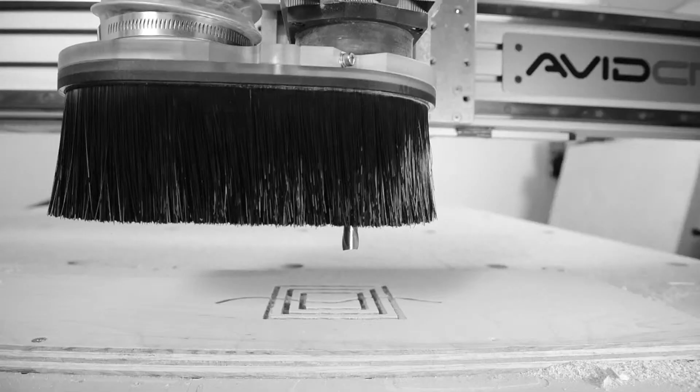Don't you just hate when your sawdust goes everywhere? Don't you just wish there was some sort of thought-through solution to maximize chip collection? So, welcome to Dust in the Wind, Not in the Air. I think that was the slogan you came up with, huh, Cory? Yeah, it's how do we get these chips into the dust collector and not in the shop? Right, awesome.

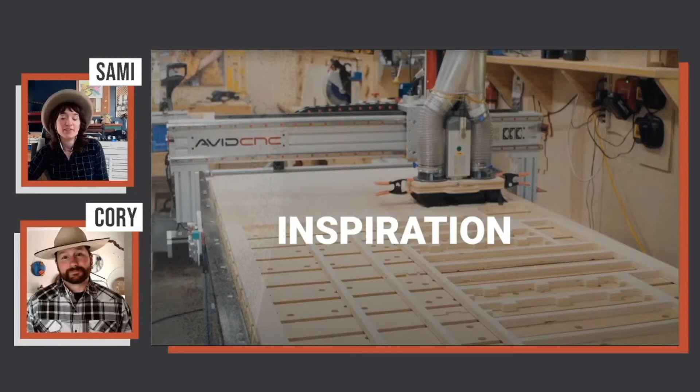So first we're going to go over some of the inspiration for this particular dust shoe that Brian Fogg, one of our awesome team members, has designed and has been spending some time refining: a DIY project that is really a more refined system and has lots of attachments and curated options depending on your particular setup. So first, let's dive into the inspiration that informed some of these design decisions.

So, Cory, will you first tell us a little bit about the original Avid CNC dust shoe project? Yeah, so this was based off of a lot of different inspiration from more traditional dust boots. It was made from high density polyethylene, or HDPE. It used a magnetic base, so it did have a breakaway feature, and was one that you could make with your CNC machine. Right, and that's really convenient to be able to make your dust shoe as one of your first projects, so you can start having dust collection sooner rather than later.

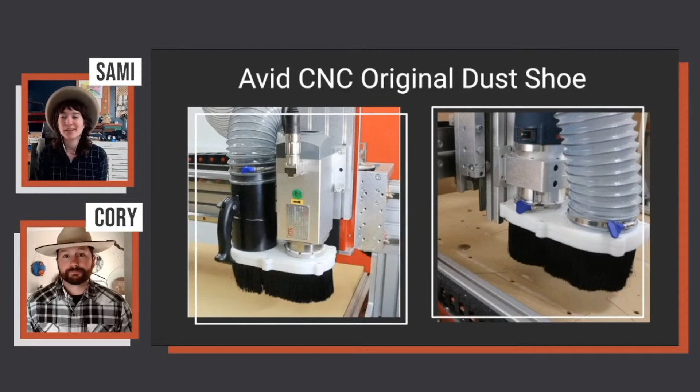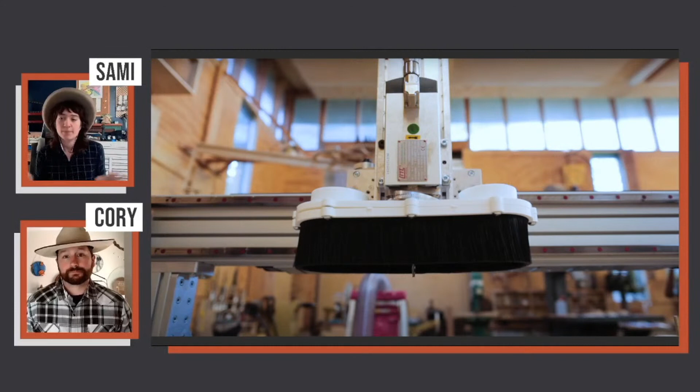I used this particular one for years and it was awesome, but there's always room for improvement and customization. So another CNC legend that we definitely drew some inspiration from is Frank Howarth. He was probably one of the first people I saw to do a more DIY solution for the dual hose dust boot, which is really great depending on if the machine is moving left or right, if the chips are being shot either way, there would be more distributed collection there, right?

Yeah, and Frank went way beyond the dust shoe on his dust collection system. He has a ceiling attachment and a bunch of really great elements that make his machine able to collect that dust effectively.

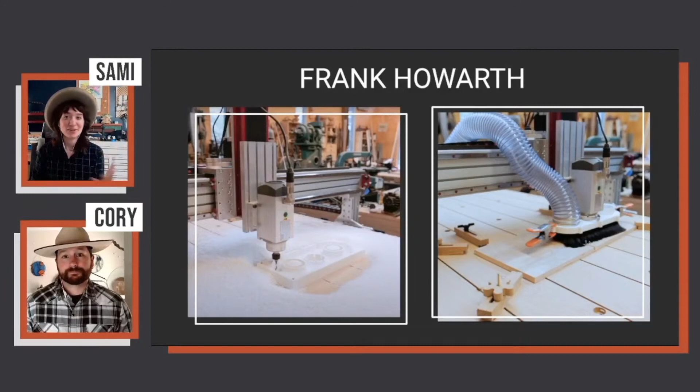Right, and I also have a really lovely curated playlist all about CNC dust collection. Many of the videos included show content creators' solutions, whether they decided to purchase a dust shoe or make their own, as well as how they integrated it into their larger dust collection system in the shop. CNCs are really a part of the larger ecosystem, so tying it into central dust collection is really essential.

And another awesome maker that we referenced and were inspired by was Jay Bates. He made a plywood version of the dust shoe that also had the breakaway feature. I think this was really appealing because more folks have scrap plywood than scrap HDPE available. So this was a really approachable project, and I really liked that it was something anyone can make pretty much the first day you had your machine up and running.

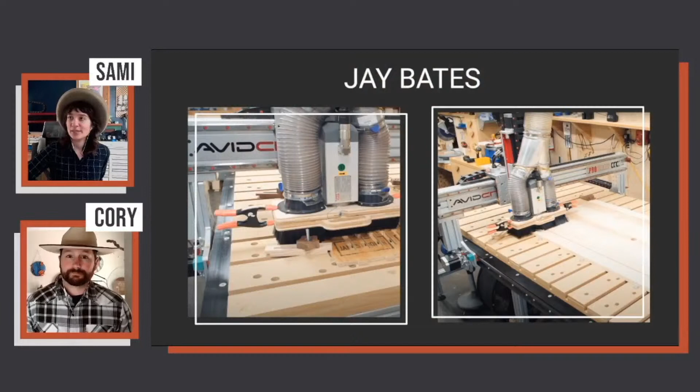Okay, so let's jump into our strategy overview for how to approach designing a shoe, and the different kinds of things you might consider when making those decisions. So Cory, do you want to take us away on some of the things you might consider with dust collection strategy?

Yeah, so the first one that I like to talk about is bit selection, and bit selection is going to help determine a couple things. It's going to help determine where the chips are going and where they're not going. And so whether it's a down cut, an up cut, or a compression bit, we should be aware of where those chips are going to be headed and be accounting for that in our toolpath strategy.

We'll also get to dive into what is a good chip and talk a little bit about chip load and chip evacuation and really how to maximize that as well. Yeah. And then we'll talk about different custom stuff that you can do for your particular work environment. And also just the dust boot or the dust system that you're using, different tools, different materials. We could have very different dust boots and success there.

Right. And something that Brian was sure to point out to me to consider is the materials, not only the different attachments you might use for different materials, and we'll dive into that a little bit more, but what kind of chips and if the material will create chips at all. So for example, a lot of types of foam aren't able to create chips like you can with more sheet goods like hardwood or MDF or plywood or aluminum, and really how to make adjustments for those particular things, right?

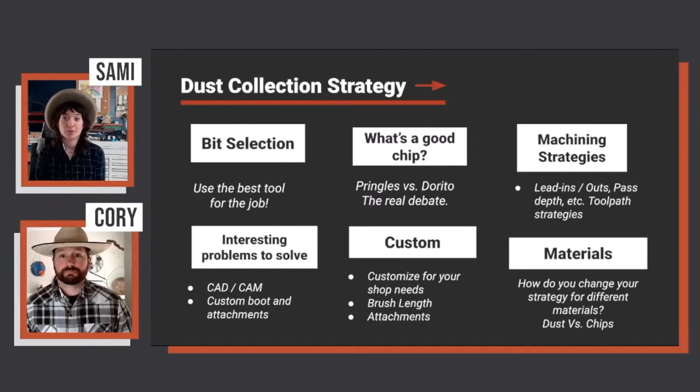So let's go ahead and talk a little bit about chip canyons and channels. So Cory, can you fill us in on this term? I think this is a term that we kind of came up with to describe the problem, but also the solution. Yeah. So as our tool moves through the material, if that canyon or the negative space the tool is creating is only the width of the tool, we have very little chance for those chips to come out of the canyon unless they are encouraged to come out.

And so when we talk about that chip buildup, if we're not encouraging the chips to leave the canyon, the next time that tool comes around, those chips are going to act as an insulator. So they already have a bunch of heat built into them when we created them. And then when we come back, that heat's going to continue to build and store in that canyon. And heat is going to be the fastest way for us to dull our tool, which is the fastest way to have a reduced cut quality.

Right. You know what? This analogy really reminds me of the visuals in some of our state parks. So I think of this hike called the Narrows in, I want to say it's in Zion, and it's a very, very narrow kind of canyon. So when it floods, the water just rushes down, and it's very hard to kind of get out of the way. Everything kind of gets blocked up if there's debris.

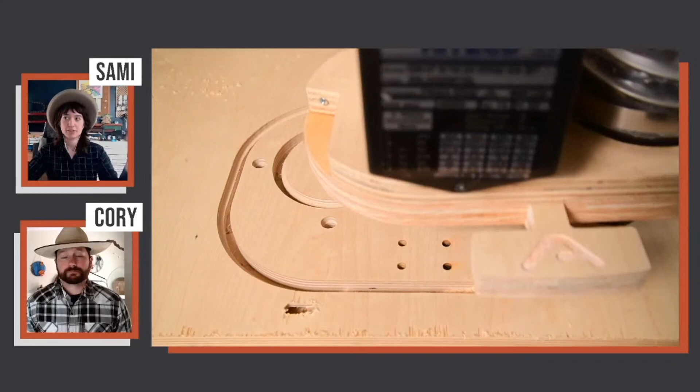Right, exactly. So offsetting those vectors, say for example you're doing a profile cut, and offsetting the vector, cutting that halfway through, and then cutting the final vector will allow for an additional step for that chip to evacuate, which is a machining strategy that Brian implemented here in the project files as well.

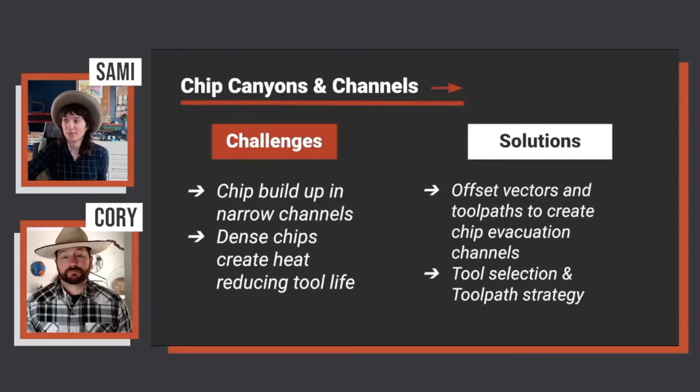So dust versus chips. Can you describe to me a little bit about why we would like to avoid dust and what we might do if we can't avoid making dust? Yeah. So if we are making dust, ideally the scenario is we're cutting MDF, and that's because you cannot make chips with MDF. It only makes dust. And so how we make dust is we are rotating our tool too fast for our feed rate. And so we're rubbing or essentially creating such a small chip that it is considered dust.

And when we are using tooling like that, essentially we're going to dull the tool a lot faster, and we're not going to evacuate the heat. This comes back to heat a little bit here.

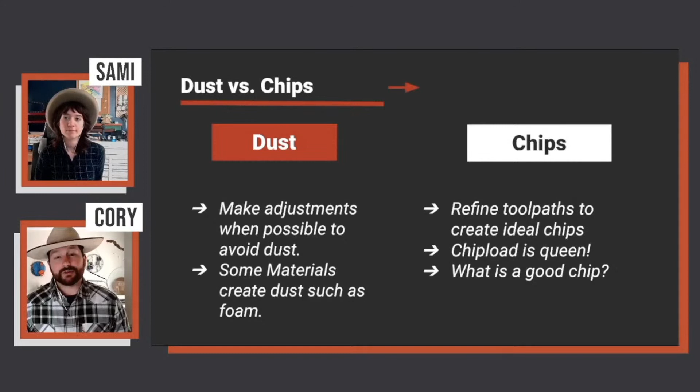And so when we talk about inspecting our chips or our dust, if we see dust, we should slow our rotational speed of the tool down, or we should increase our feeds or our lateral movement of that tool so the tool can have more bite.

So I love hearing you talk about chip load also. This was one of our subjects for last year's Vectric user group meeting, where we kind of dived into plywood and plastics as well as aluminum and brass, and really how to refine your chip load and all of the knobs you might turn to get the ideal chip. But maybe you can give us the spark notes on this subject.

Yeah, I like to use an analogy of bread. If we have a really dense bread, we can cut a perfect slice of that bread that's very thin because the density of the bread holds it together. So if we had a pound cake, we could cut a really narrow slice and it would still look like a complete slice. It wouldn't be falling apart into crumbs. And if we had a lighter density like a French bread, we might have to cut that at a 1 inch thickness or 3 times as thick in order to get a perfect slice. If we tried to cut it smaller, it would just turn into crumbs.

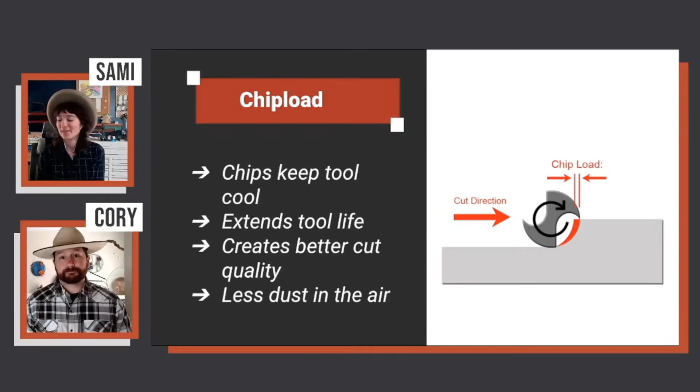Oh, I love that visual. That's awesome.

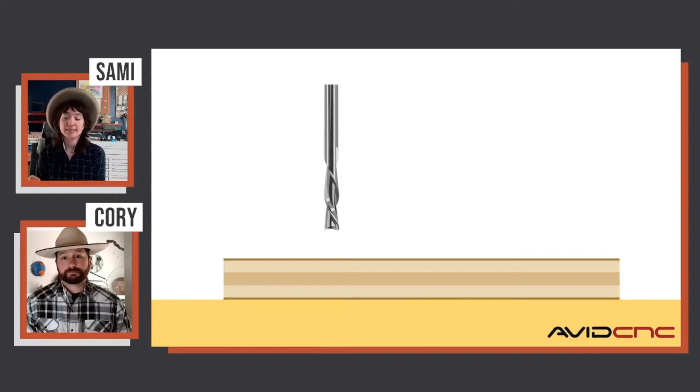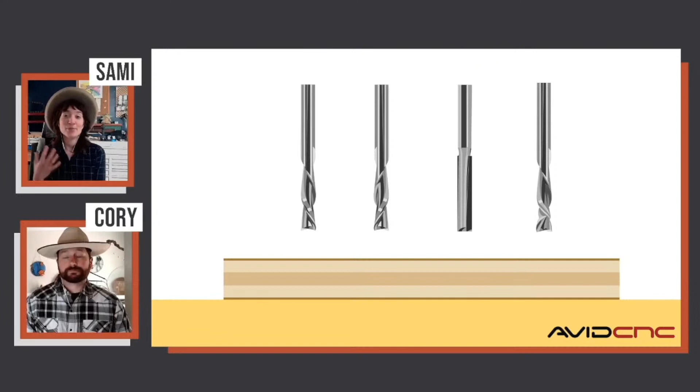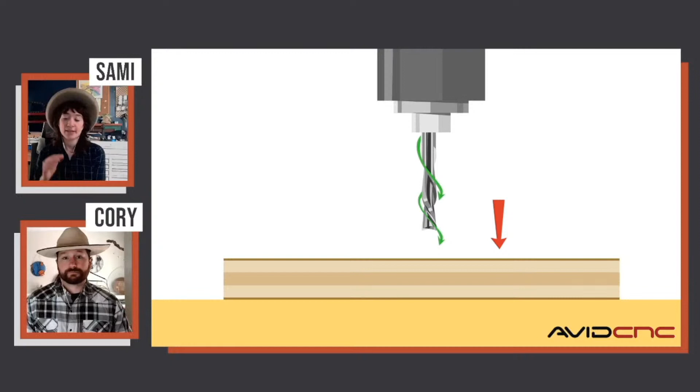So another thing you might consider is tool geometry. You'll consider the shape of the tool to match your material and your cut quality needs. So you might choose a down spiral in order to have a really nice surface finish on the top of your veneer. However, a down spiral bit really presses the chips downward and compresses them. So it's not as ideal for chip evacuation, which, as we're talking about, is our goal, to maximize it. So you have to make adjustments, like for example, doing the offset toolpath to create a wider canyon.

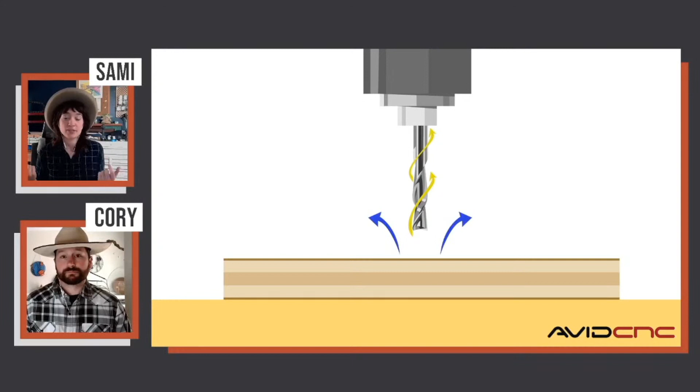Or you can select a specific bit like an up spiral bit if you're cutting something like HDPE or aluminum in order to evacuate the chips, especially in circumstances where compressing the chips would really heat the bit up too much. So a down spiral bit wouldn't necessarily be used for peck drilling or creating deep holes, because as it's creating that hole, it's jamming the chips downward, creating heat, which is reducing the life of the tool.

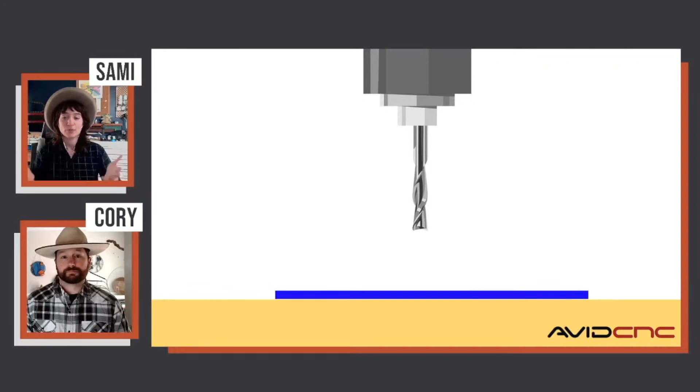An up spiral bit will potentially tear out the top surface of your veneer, but it does help evacuate chips. It is more ideal for something like plastics, where you want to remove the chips as much as possible, but still leaves a good surface finish on the top. It doesn't have that issue with grain direction like you do with wood. So those are some things to consider, whether it's selecting the tool for the best cut quality, but then also how to make adjustments for that tool geometry, whether it's in your CAD or your CAM, in order to get the ideal combination of choices here.

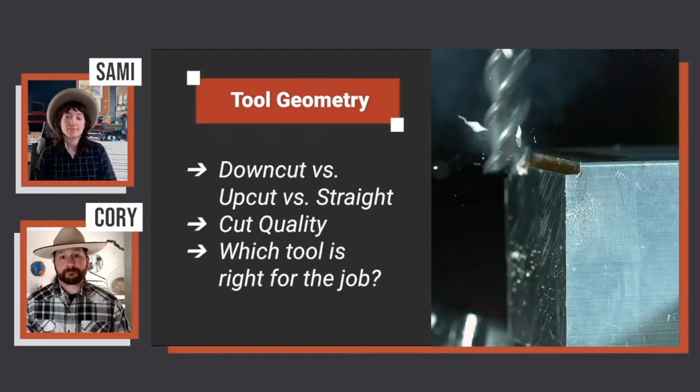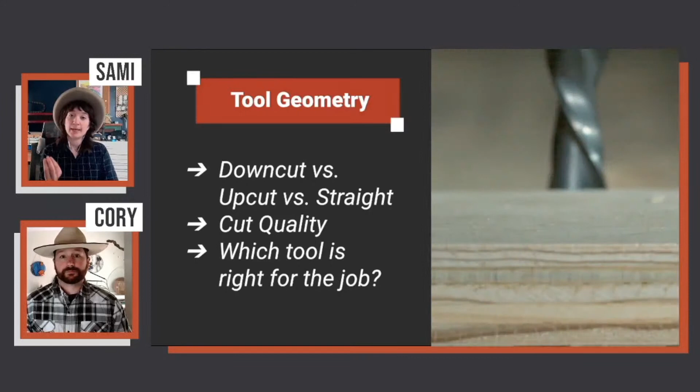And as you can see here, there's an excellent video by Jonathan Katz-Moses, and he has some slow-mo footage of a down spiral bit versus an up spiral bit versus a straight bit. So you can really see how the bit is affecting and making the material flex as it's cutting.

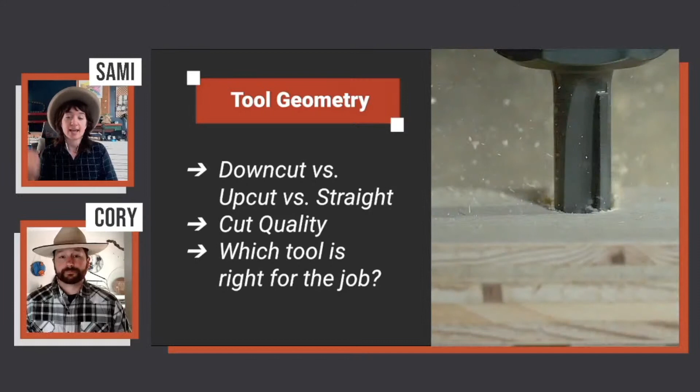As we were just talking about what you might consider when selecting the bit, other things you might consider are if I select multiple tools that are ideal for different types of tool paths. For example, I might have a peck drilling operation as well as a profile operation. Perhaps the ideal tool for both those tool paths are different. But if we select the same tool for both of those, that would reduce the number of tool changes that we have to do.

In this project, to make it as simple and straightforward as possible, Brian programmed it with one bit, which was the quarter inch down spiral. In order to accommodate for that, he made some adjustments to the CAD and CAM so that that particular tool would still work in scenarios where you might have chosen a different tool.

We also included the appropriate ramps and additional tool paths for when we come in and make contact with the material, and when we're down in the bottom of those canyons, there's an opportunity for those chips to get out. So the challenge when creating your CAD and CAM is to look for opportunities to create chip evacuation. Creating a ramp and a lead-in allows more space for those chips to move out of the way of the router bit.

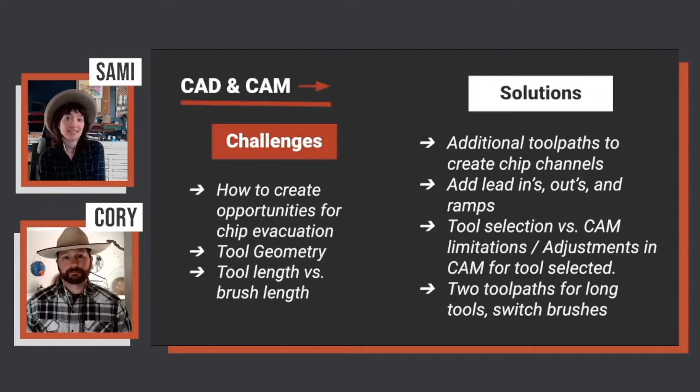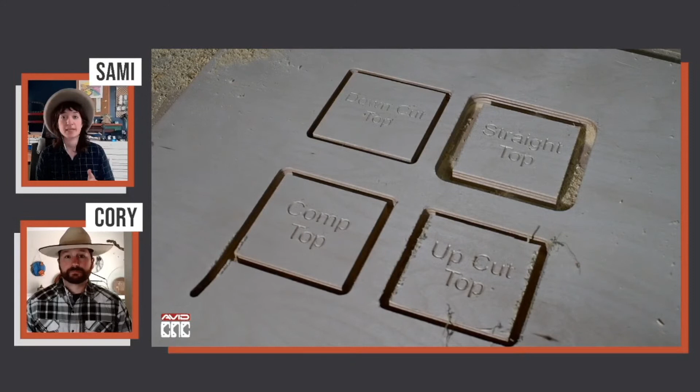This project might give you the opportunity to do some tests. If you're going to do a large production run of something, it might be worth it to do five smaller tests of that particular material with that particular setup. You have specific fixed variables, probably the material or the tool you're using to cut that material for that geometry, that vector geometry, and then adjusting what attachments and what toolpath variations you add in.

Cory, can you tell us about what's a good chip? I'm partial to Pringles, but Brian and I were having this debate the other day, he's more of a Dorito guy. So really, how do we determine which one is better? I gotta say, Tim's Cascade jalapeno, it's kettle cooked in peanut oil, there is no better chip. Yeah, that's fair.

And then when you cut your chips, you were mentioning earlier that we were talking about doing various tests. When you cut a chip and you're turning a different variable, what's the difference between an okay chip, a good chip, and a really good chip? Say, for example, we'll use plywood as an example. Is there a particular cut finish or density or thickness that we should be looking for?

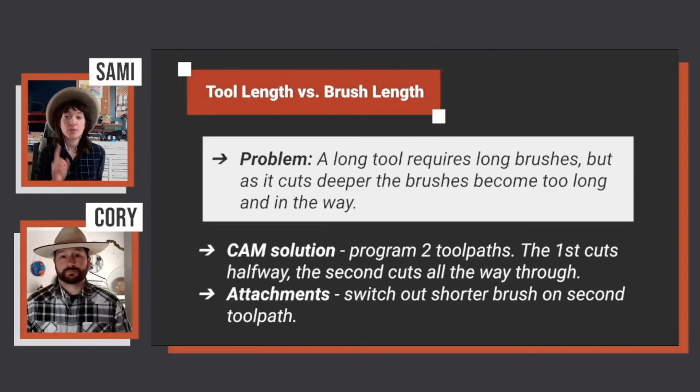There's a few different accessories that you can design, add on, and customize depending on the material you select. Having various brush lengths will help depending on the length of your tool. Perhaps you program two different tool paths for the same tool, say it's a long reach tool and it cuts through halfway, then it will stop. In the second tool path, you can switch in the shorter brush length so it reaches just the top surface of the material as it does its final passes.

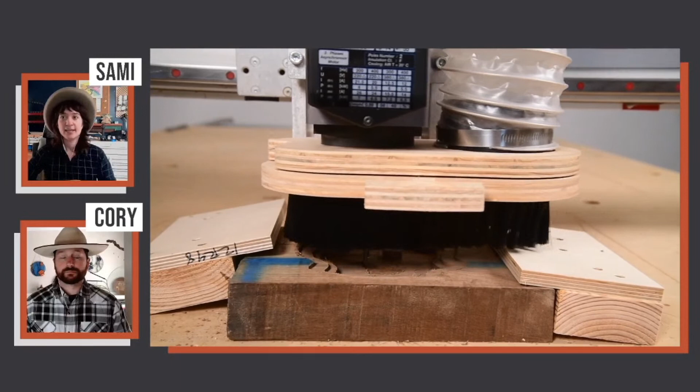You can also add on a reducer from 4 inches to 2.5 inches in order to collect the chips adjacent to the tool paths.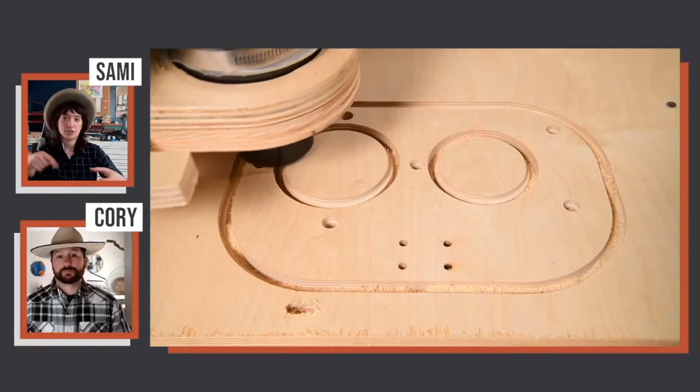Brian did a very clever thing here, which was to offset the tool paths, the spacing between the spindle nose and the hose on the side, so that the reducer went right above all of those canyons and was able to suck up all of the chips within the canyon itself. The reducer allows us to remove the same CFM air, but out of a much smaller nozzle, so we're really going to pull even more chips out of that canyon using this reducer.

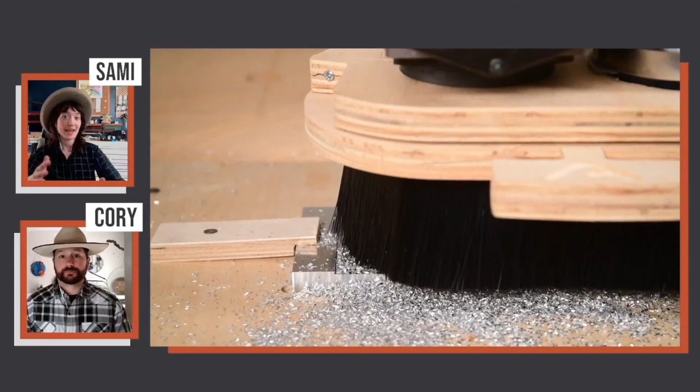There's also a compressor attachment where you can direct the air to blow the chips away. For example, when cutting aluminum, one of my least favorite tasks is cleaning my brush afterward, because it's full of fluid and aluminum chips stuck in it. So instead of having a brush for cutting aluminum material, you have compressor attachments that blow the chips into a directed area. There's also a lifespan to the brushes, so they are kind of a consumable object.

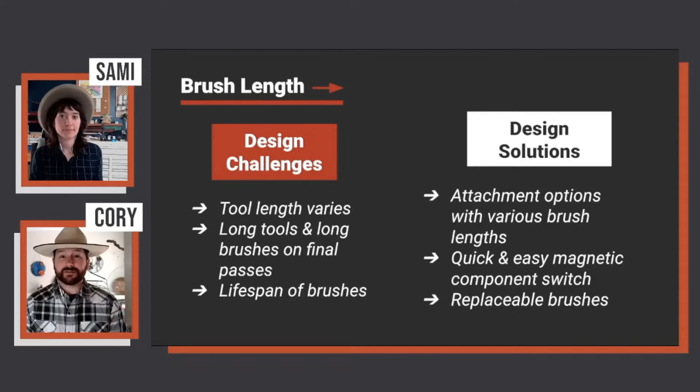This design allows you to replace the brushes as necessary, and these are inexpensive parts that you can machine over and over again. I would encourage everyone to have 2 or 3 different brush lengths, and if you want 4 or 5, between your reducer and other things, nothing is stopping you here with this design. It's very accessible and cost effective.

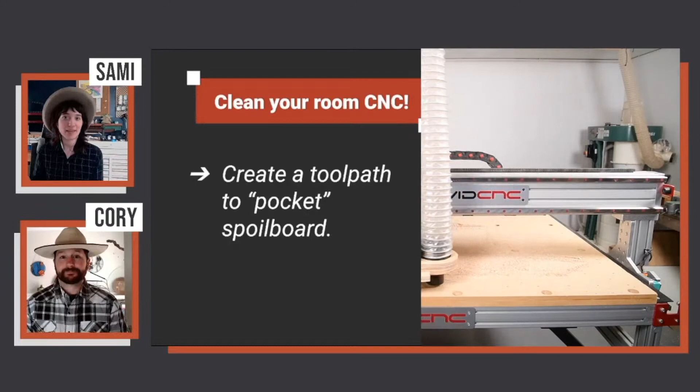So Clean Your Room CNC, this was a program I used to run, and I'm sure many other CNC operators used something similar. But this is just what I called it. Cory, I'm sure you do this as well, creating a pocket tool path so your CNC runs across the spoil board to clean up all of your chips and extra dust at the end of the day. It's always nice to come back to a clean machine spoil board the next day.

It also helps with the fact that you can't always reach the other side of the spoil board with your shop vac, and chips can escape, so it's nice to just have a sweep at the end of the day. Yeah, I think this is great.

And you can do different versions of this. You can have one that essentially just does the perimeter, and one that rasters along X or Y. Mine is saved on my desktop, and I run it all the time. When you told me about this, it was like, wow, that's such a simple solution. You can load the G code, hit start, and walk away, and it cleans itself up.

And we'll say, remember to remove the tool before you run this. It's nice to know there's no tool that will accidentally scrape across any material or the spoil board, and you can just allow the brushes to do the work there. I also usually just kill the spindle motor after it started, just so it's not spinning.

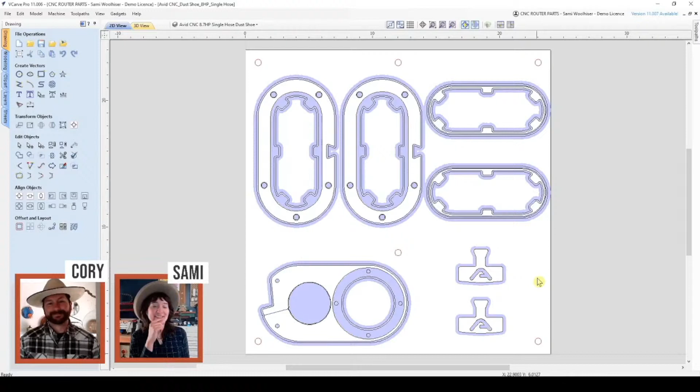Oh my gosh, I would have given a talk all about individual vector scaling if I had the opportunity to give another talk, and I certainly will have to do a live stream and a few videos that really dive into how you can leverage that. It just makes modifying and evolving designs so much more fluid when you don't have to start all over, or when you can move those together.

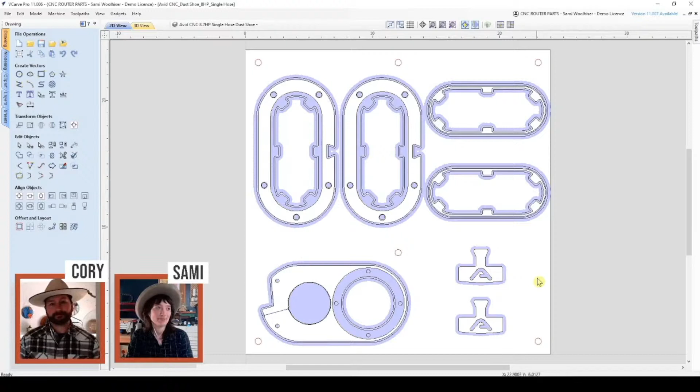Right, yeah, absolutely awesome. So let's just dive into a little bit of the cam choices in this dual hose dust boot and do a quick walkthrough of this.

All right, so we have a number of different toolpaths here to make this boot, and I'd like to go through each of these. We're not going to touch on every element of these toolpaths, but we do want to put special attention towards some of the cam techniques we've programmed in here to have this downcut tool achieve okay chip evacuation, or better than typical chip evacuation.

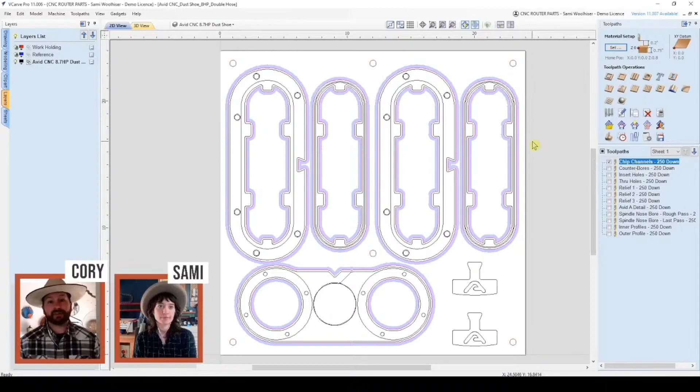So this first one is a little bit of CAD and CAM. I'll just zoom in here. This is the final profile of the interior of the dust boot, the brush retaining ring. This first toolpath is the chip channel, and the vector that's selected here is the offset of the final profile.

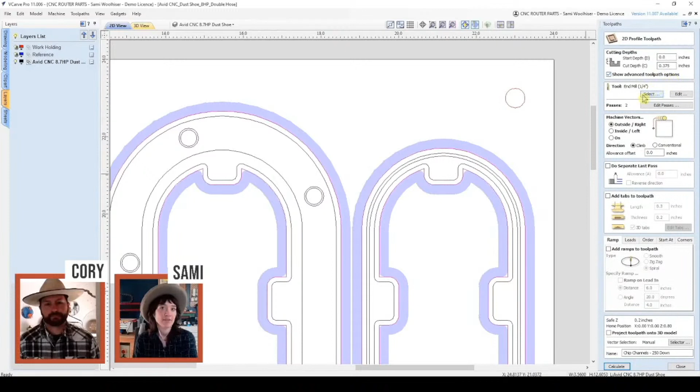So let's open this toolpath. We can first see that the cut depth is 0.375, so about half the thickness of the material, and we have the 1/4 inch down spiral selected. Let's check out our feeds and speeds here. Of course, these are going to vary depending on your particular machine capabilities and all of those variables as well.

Yeah, but we are trying to target a chip load of somewhere between 3 and 5 thousandths thick with a material like the Baltic birch plywood we're using. Right.

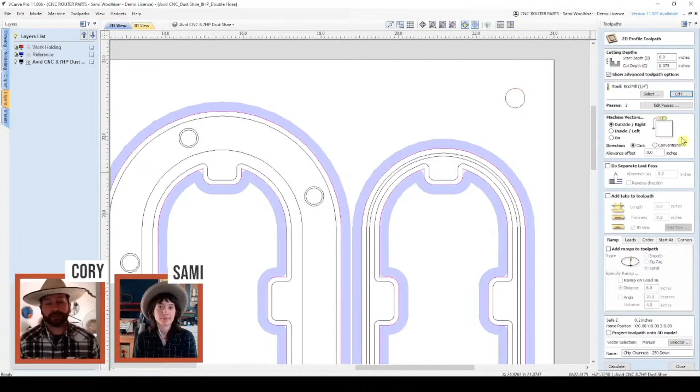Here are the counter bores. So these are the bores for the magnets to sit in. And if you can see here, we are using a profile toolpath rather than a pocketing toolpath.

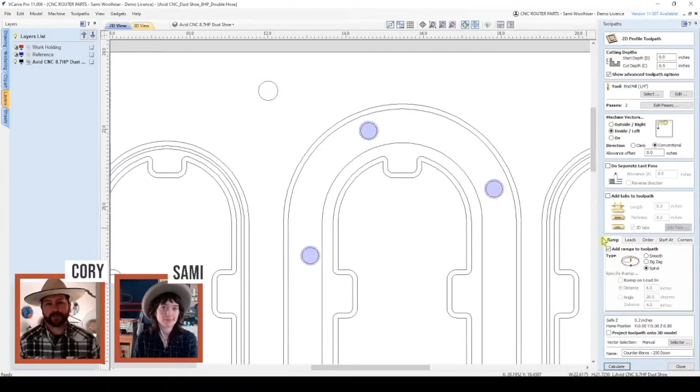This really allows you to use the ramp tool in a spiral to ensure that you're having a nice ease down into the center of the inside of the vector. Yeah, exactly, so this is going to give us a nice smooth helical move into the material. It's not going to give us a drilling motion, but more of a helical motion, and it's going to allow us to get a really good clean cut.

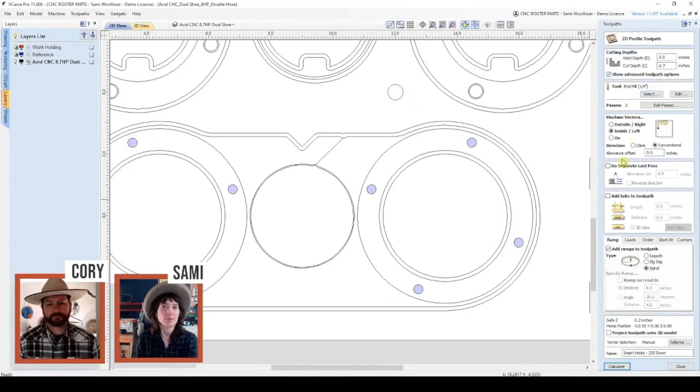So these are the insert holes. I believe these are for the threaded inserts that will hold the reducer flanges on. We have this cutting through with the same tool we have selected for every toolpath, and this is also a profile toolpath implementing the same ramping strategy.

So here are the through holes. The counter bores are kind of the lip that the edge of the magnet can sit on, and this is the space for the air and the extra glue to kind of be pushed through on the other side as you're inserting the magnet.

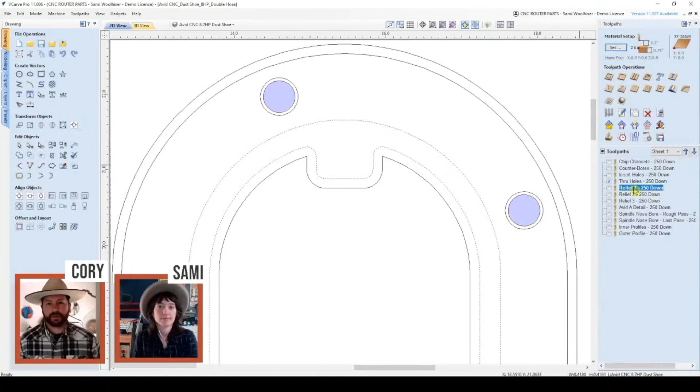We'll use the same ramping strategy as we did for the other through holes, with the smaller interior diameter. Yeah, and with this downcut tool specifically, if we were to try to implement a pocketing style toolpath in this area, we would essentially be coming straight down into the material in a plunge in the center, and then work our way out at that depth of cut. And with that downcut tool, that's really going to increase the heat built up in the tip of that tool. Right.

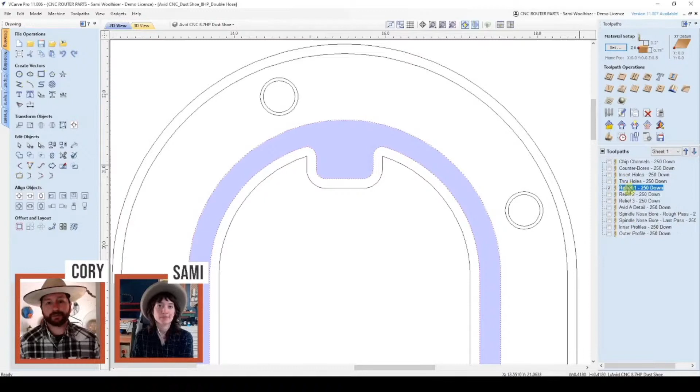Next we have the relief, and this is for the brush retaining ring and the brush to sit into, so that's really pressure fit into that space. Yeah, and this might be another area where you make some small modifications depending on the type of brush that you have. In the event that your brush is a little bit thinner or thicker than the one listed on the bill of materials, you might adjust this retaining ring.

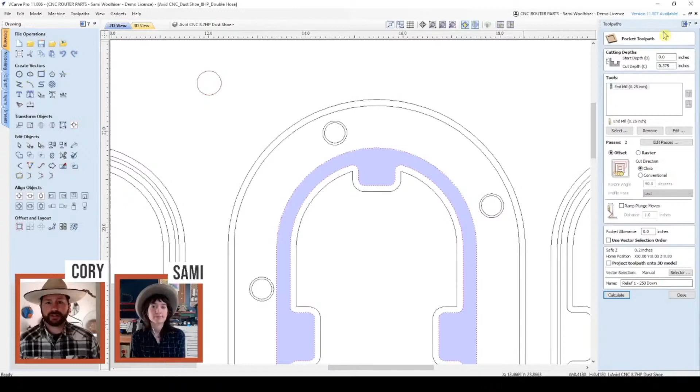Here is relief number 2. This is to give an additional cavity here and lip for this part to nest together into the top plate or the brush plate.

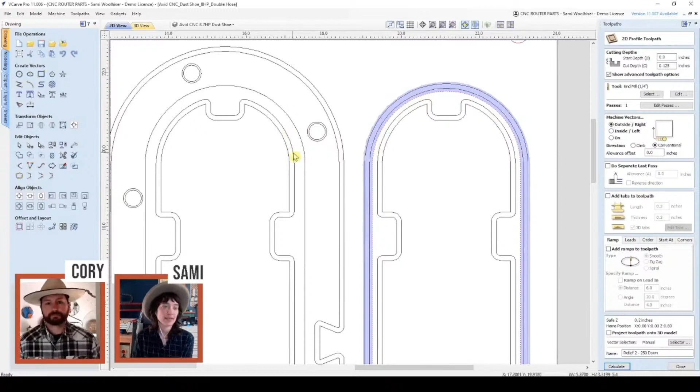So the next toolpath we have here is the, there we go, bring it to a good view for you. This is a relief for those reduction flanges to sit into. So making sure that the diameter of those match the particular material or part that you have sourced. This will work with the one that we have on our bill of materials, but if you have a couple extra lying around, might as well use those and make that minor adjustment.

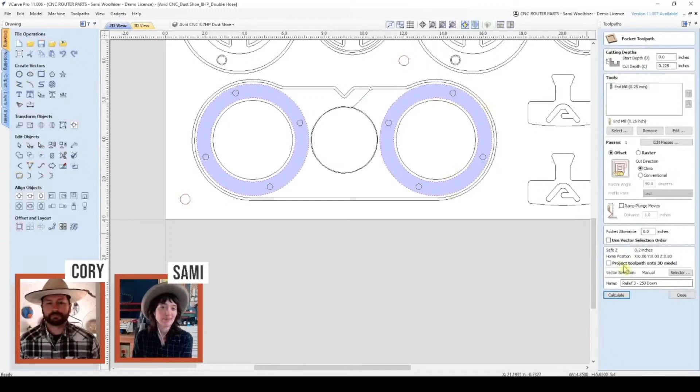Here's a small pocket detail for a little addition on the handle here. Then here's the spindle nose bore, which is the final pass here. What I will note is in the CAD we have a little dip here and a dip here. This line is indicated as a cut line that you will make with a small handsaw in order to put your screw through here to pressure fit and just have a little extra fastener to hold this top plate to your spindle.

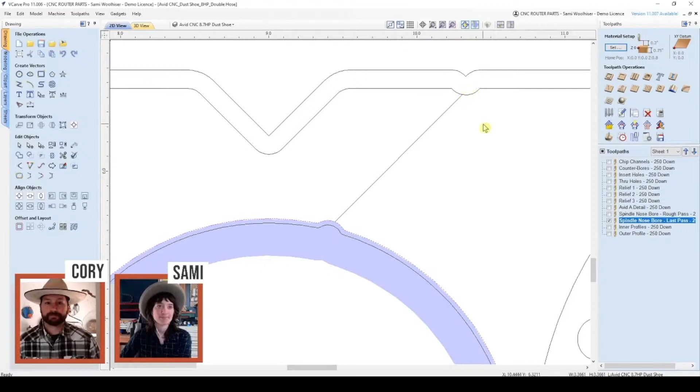Yeah, I think this was a great design element by Brian. He put 2 small detents in these toolpaths, and so when you go to make that cut, all you have to do is line the saw up with those 2 detents and it's in the perfect position. Right, and it's got some good tolerance variation there. We know you're using a handsaw, but the tolerance is open enough that as long as it's between these 2 marks, it'll be very easy to do. And you can definitely see the J. Bates design influence there. Big time.

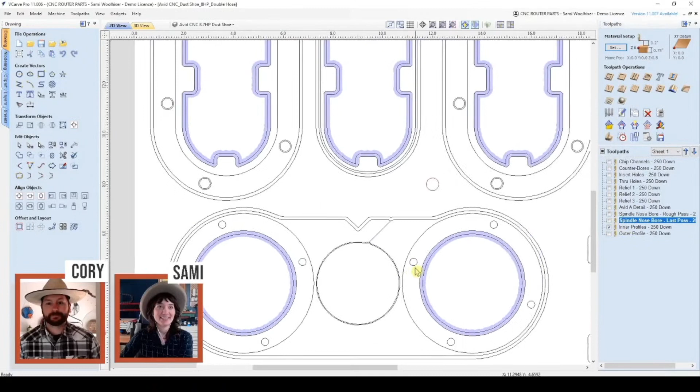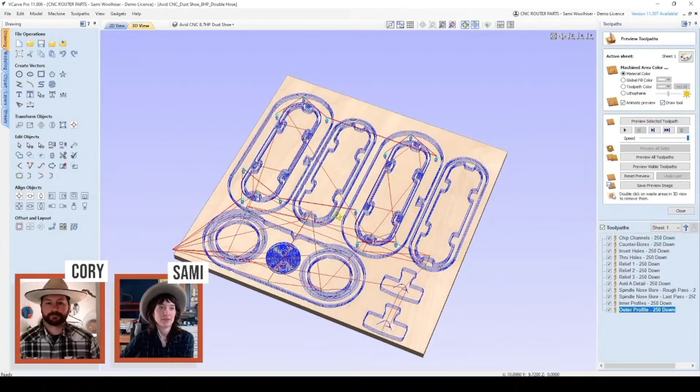And then lastly, we have the interior profiles as well as the outer profiles. So we have the channels that cut a lot of the extra canyons for chip evacuation, and then there is the final profiles. So let's go ahead and do a quick preview of our toolpaths. And I love that Vectric allows you to preview these independently or all together at a lot of different speeds. And sometimes when designing in a 2D drawing environment like this, the toolpath creation area is critical in regards to making sure the right sequence is happening and the material is being removed in the way you anticipate.

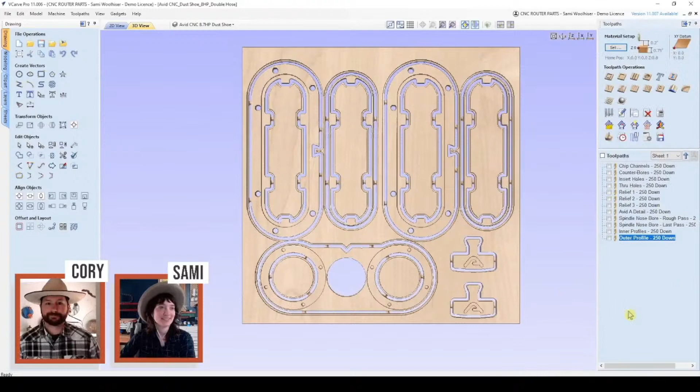So that is the new dust boot design that we will be creating further content about, the step-by-step how to set up and run it on Mach 4, and that will be coming out on our channel soon.

So if you all have any questions, I guess we'll go ahead and jump into a Q&A. Any other last thoughts you'd like to add here? Well, it's been a long road, but I'm ready for the questions. Let's do it. All right.